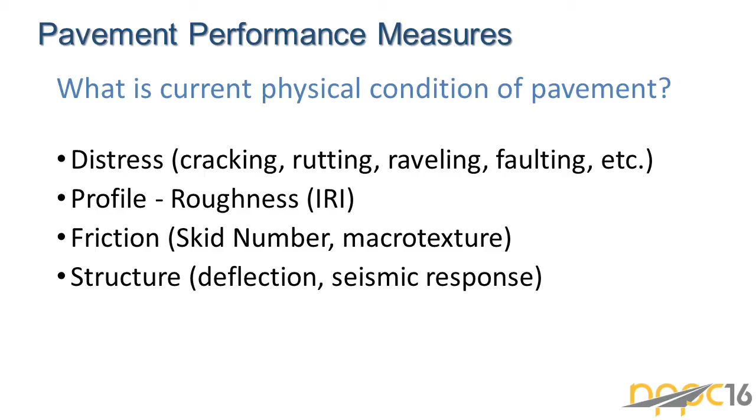So over time, we've continued with that. In the 1980s, we developed the IRI. There's friction measurements and structural measurements. So really, performance management is ingrained within the pavement management discipline.

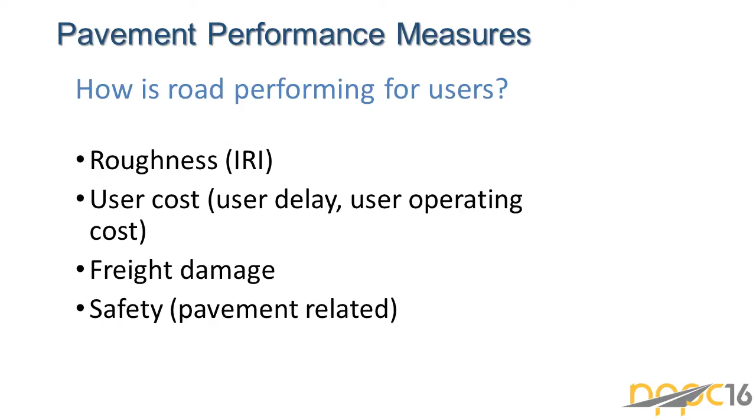Now, most of those measures relate to the agency, but how's the road performing for users? They're the ones who are paying for it. So roughness is a big one, and that interacts a lot with user operating cost. There's also user delay cost, freight damage, safety. So there are more performance measures that we can look at from the user point of view, but we have to realize, well, what's the end result and why are we using these particular measures?

So with MAP-21, we know that we're going to be doing a lot more performance management. And this is from Title 23, where MAP-21 resides in the US Code. Performance management will transform the federal-aid highway program and provide a means to the most efficient investment of federal transportation funds.

But there's nothing in the MAP-21 performance measures that relates to the most efficient investment of federal transportation funds. There is in the asset management part, we need to develop an investment plan, but in the performance measures part, there's nothing to show Congress, well, have we really done the most efficient investment? So I think we will see that over time.

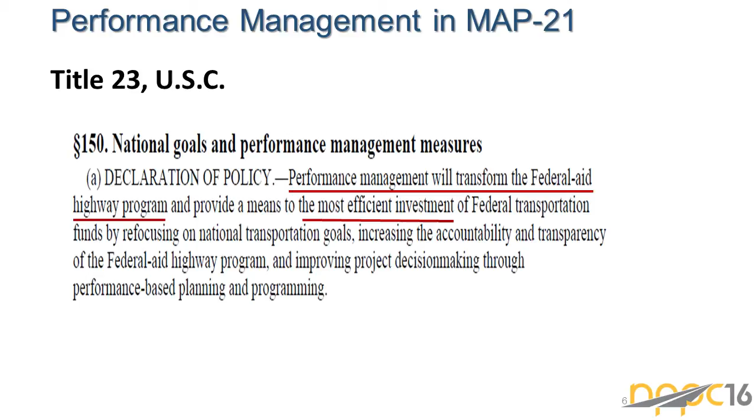And then this is something that we've been using at Washington for several years now, and that's cost effectiveness. This is our real workhorse for performance measures. And the units of dollars per lane mile per year is a very nice common denominator to compare different treatments, different performance, and to prioritize projects into the future. So we use this a lot.

So in order to evaluate the most efficient investments, this annual cost term, dollar per lane mile per year, is what we use most of the time. We use this to prioritize projects. We use it to evaluate historical performance. And so when we're looking at the future, then that's more of our traditional life cycle cost analysis, but we always do it in terms of annual cost.

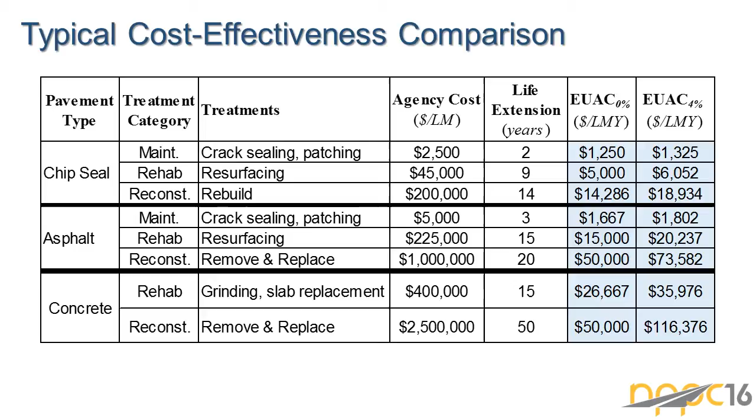So I'm not going to cover this curve in detail. We've seen many versions of this. But as we look at the different treatment options as we go down the performance curve, we start off with preservation. We try to do that as much as possible. And then rehabilitation will be delayed when we do those preservation treatments, and that helps our annual cost as well. So not only is preservation cheaper on an annual cost basis, it also improves the annual cost between rehabilitation treatments.

What we really want to do is stay away from the lower part of that curve, below the optimum time for rehabilitation, because the reconstruction costs are very high, but also the user costs are very high when we get to the conditions that are very poor. And we've been very successful at doing that. For our flexible system, we haven't done any reconstruction for decades. We've been able to keep all of our flexible system above that line, and it makes a big difference.

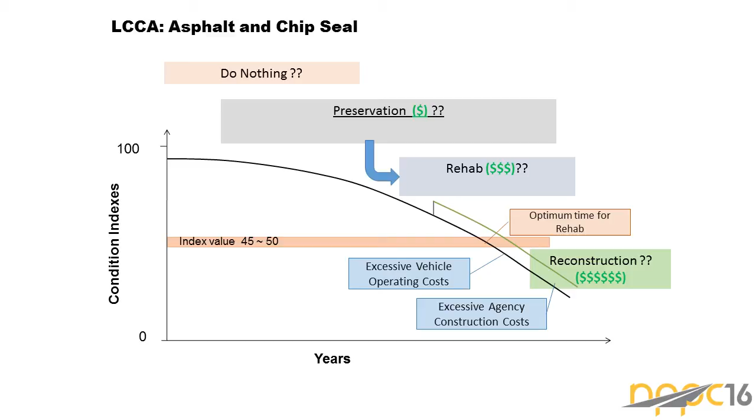So in order to do evaluations then of, well, when am I at a point where I need to do a rehabilitation, there's a process in decision analysis called replacement analysis. So we basically compare the annual cost of my current treatment versus the annual cost of any other treatment that could be a replacement. And as soon as it is lower in cost, well then I should change.

So with this graph in the blue line, the annual cost will continue to decrease year over year just because we're dividing the initial construction cost by more years. So the annual cost is on the left axis. The annual cost will keep going down as we get more and more years. But as time goes on and we do more and more maintenance and we need to do more and more treatments, well then that cost will begin to increase.

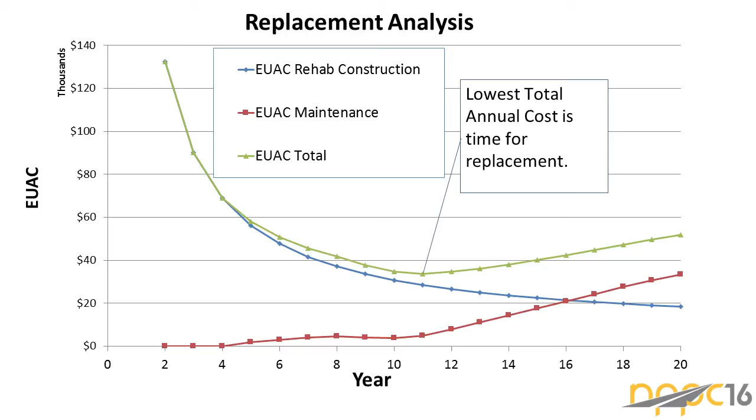So the green line is the total cost, the sum of the maintenance and the agency construction cost. And so we get that low point where this is the optimum time for change because our annual costs begin to increase. So the bottom of that is really defined as the economic life of that treatment.

So we could look at a couple of examples. We have an initial cost of, say, $250,000 for a rehabilitation. If it lasts 12 years, the annual cost is $26,600 and some. But an alternative treatment would be, instead of going 12 years, if I spent $5,000 per lane mile in year 10 and another $15,000 per lane mile in year 15, I can extend that to a 15-year performance period, and it goes to $23,000.

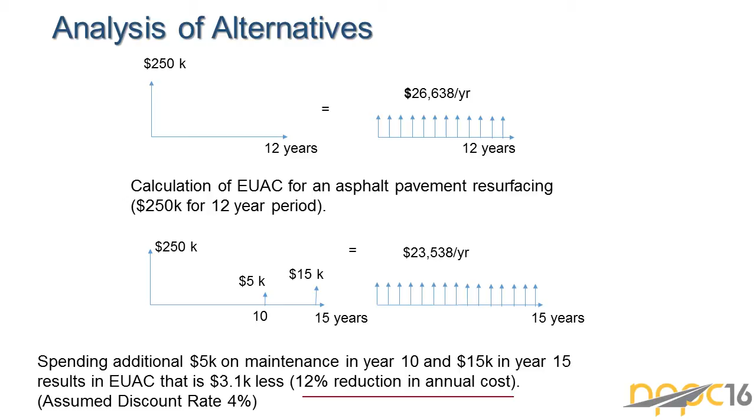So I spent money, but because I've extended the life, I've reduced the annual cost, and I've actually had a 12% reduction. So those are the kind of trade-offs then that we can evaluate, and we can do a break-even analysis to say, well, how much money could I spend in year 13, say, in order to get that to 15 years? And I could spend $70,000 a lane mile and still break even. So this way I can evaluate the trade-offs of different treatments and see where the break-even is.

If I know where the break-even is, even though I don't know exactly how long this is going to last, I don't know if it's going to last 15 years, but I know that if it lasts 15 years, what the break-even value is. So that helps me in my decision process. So we've looked at mostly to now just performance measures for decision support. But as we begin to look at other uses like accountability and communication, how can I use those measures better?

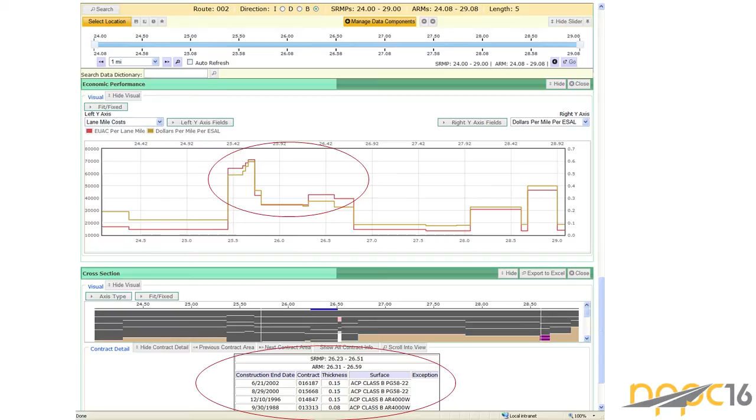So this gives us the information available to see what we're spending now, and then we can evaluate it with other alternatives, but it gives us a really good way of evaluating it. So those are all project level where we've really been able to use annual cost, but what about the network level? Well, a few years ago we developed some new network level performance measures, and I'll go over 3 of them: remaining service life, asset sustainability ratio, and deferred preservation liability.

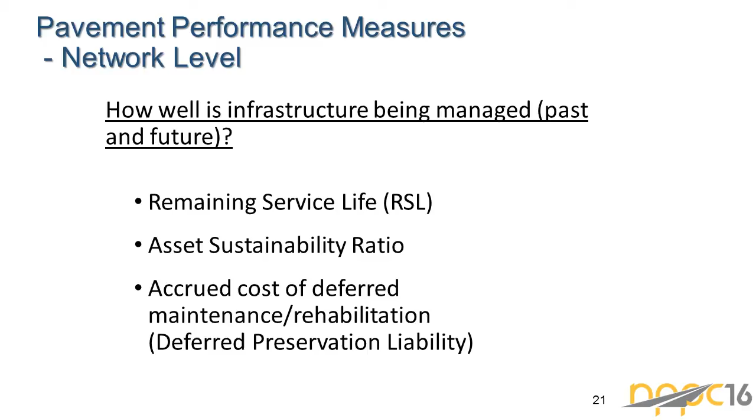So the first is remaining service life. Many of you are familiar with this. The FHWA has evolved to remaining service interval, which is fine. It's basically the same concept where we're looking at, for any individual pavement section, how much time do we expect until we need to do rehabilitation? And then we could also express it as a percentage. So if we typically have a 20-year pavement life and we've gone through 10 years, we could say we've gone through 50% of the pavement life.

Well, what we used this information for was to explain to our executives and the public and the legislature what was going to happen if we had some real serious decreases in our budget. Because that was the plan. As many states, we went through a lot of tough times, and we had plans for really drastic cuts after 2013.

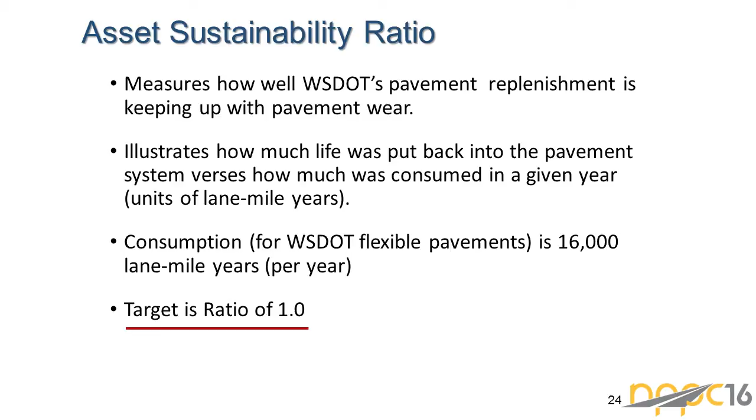Well, if I have a 10-mile chip seal, I plan that it's going to last 10 years. Well, I've just taken 10 times 10, or I've just invested 100 lane mile years back into the system. So every year, I'll show you the chart, but our target then is 1. We'd like to see as much replenishment as we do consumption. So we were able to go back to 1980 and look at the trends there of how much we're taking out, which in this case, this is only our flexible pavement, so it's 16,000 lane mile years per year.

And then the replenishment. And you can see for 30 years, there was pretty reasonable replenishment. There were some peaks and valleys, but overall, that's not too far from 1. But then we saw the projections and how it was going to be drastically decreased. So we were able to communicate that we're getting into territory in the next 10 years that we've never been in before.

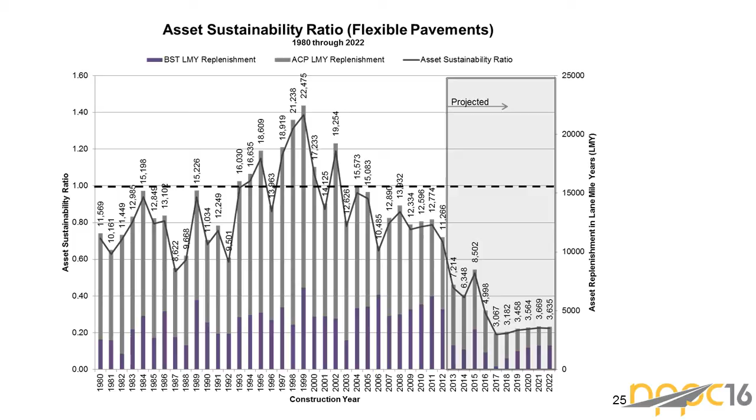And the third term was deferred preservation liability, where we try to calculate the dollars that it's going to cost us; it's basically a backlog liability term. Because if we defer a project, we're not necessarily, quote, saving any money. All we're doing is carrying a liability forward. And this is a term that helped us add up those accumulated liabilities. And over time, they increase.

So if I could have done a treatment this year and I didn't, well, next year it's going to cost so much if I try to do it next year. But if I wait 5 or 10 years, I'm going to have to spend a lot more to do what I could have done this year. So it includes really a penalty then of the additional cost of deferring that job till it gets to a more serious situation. And then that really ramps up to huge expenditures that include the cost going forward.

So I guess the good news is our gas tax passed. It took a couple of tries. I don't know how much credit we can take for it. Maybe we helped a little bit. I don't know how much legislatures pay attention, but at least we were able to communicate our perspective on what we felt was going to happen.